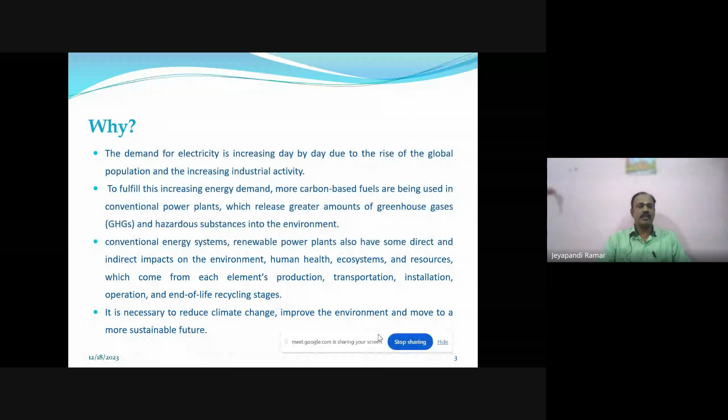What's the importance of green energy? It provides real benefits for the environment, since the power comes from natural resources such as sunlight, wind, and water, creating energy with a zero carbon footprint, which is a great stride toward a more environmentally friendly future. If we can use it to meet our power, industrial, and transportation needs, we will be able to greatly reduce our impact on the environment.

Green energy is generated from renewable sources rather than limited sources such as fossil fuels. Consumers, businesses, and governments worldwide are shifting away from fossil fuel energy toward green energy to lessen the impact of climate change and pollution. It is one of the most important forms of energy.

The key sources of green energy are mainly four: solar energy, wind energy, hydropower energy, and geothermal energy. These are the main sources for the world's life in terms of energy.

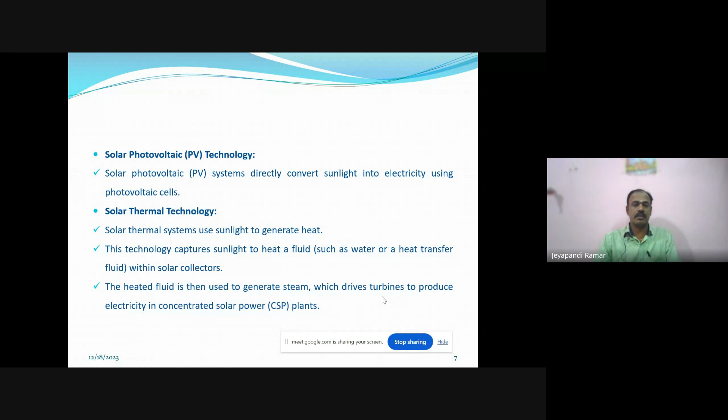As far as solar energy conversion goes, how does a solar panel work? The solar panel consists of multiple solar cells arranged in a grid form, and when sunlight hits the solar cells, it excites the electrons in the semiconductor material, creating an electric current.

This direct current is called DC. The DC is converted into alternating current, AC, using inverters to power homes, businesses, or to be fed into the grid.

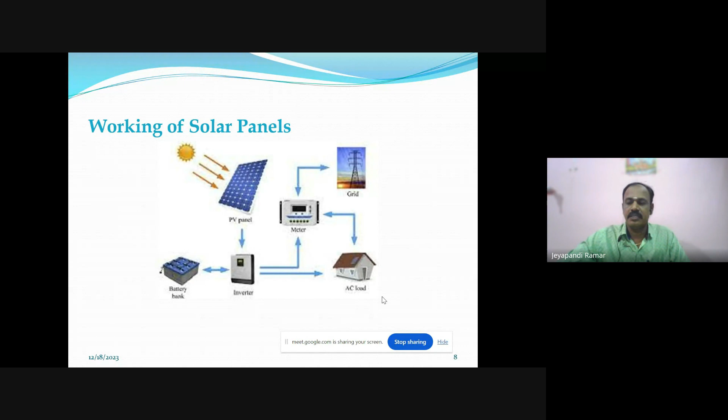The main solar system is used in our homes, restaurants, and workplaces. Applications of solar energy include residential use, powering homes through rooftop solar panels to reduce electricity bills, commercial use providing energy for businesses, offices, and industries, and utility-scale use for generating large-scale electricity through solar farms to supply our communities. Solar is our main energy source from the sunlight.

What are the benefits of solar energy? Solar energy is a clean and renewable resource, producing no greenhouse gas emissions or air pollutants during electricity generation. It contributes to reducing carbon footprint and mitigating climate change. The continued advancement and adoption of solar technology contributes significantly to a cleaner and more sustainable energy future.

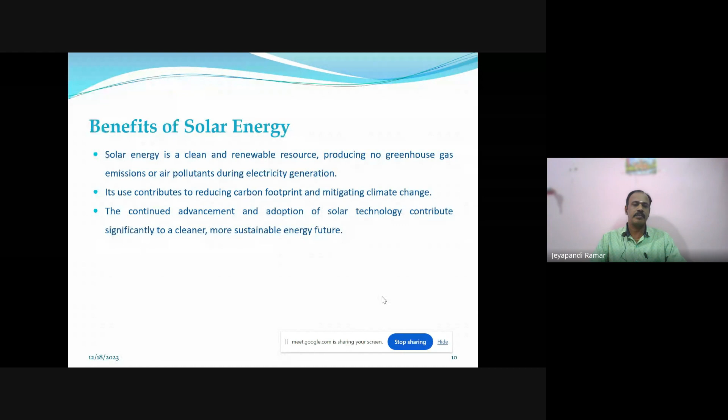This is the main energy of the future. Case studies of solar energy include the Kamuthi Solar Power Project in Tamil Nadu, India. Located in Tamil Nadu, it is one of the largest solar power plants in the world, with a total capacity of around 648 megawatts. It covers a vast area with solar panels and contributes significantly to India's renewable energy goals.

Another case is the Pavagada Solar Park in Karnataka, one of the largest solar parks in India, with a total capacity of 2000 megawatts. The park aims to harness solar energy to meet the state's power requirements.

Next is the Rewa Ultra Mega Solar Park in Madhya Pradesh, developed through a joint initiative of the Solar Energy Corporation of India, SECI, which is a main source for renewable energy in the solar system.

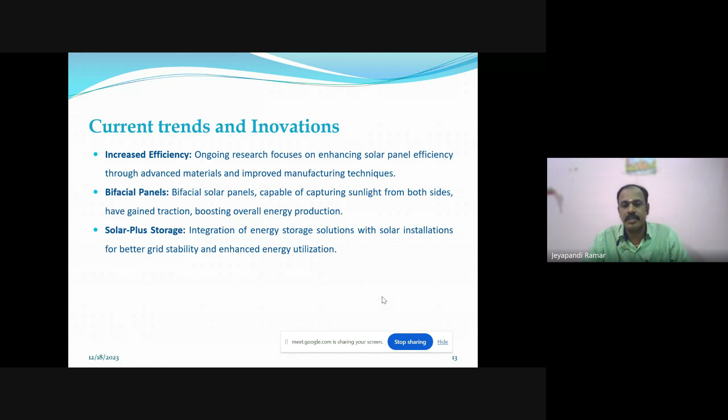Solar plus storage involves the integration of energy storage solutions with solar installations for better grid stability and enhanced energy utilization. As for future prospects, the first is perovskite solar cells.

It's for advancements in perovskite-based solar cells, offering potential cost reductions and higher efficiency compared to traditional silicon-based photovoltaic cells. There is also research into tandem solar cells, combining multiple materials to capture a broader spectrum of sunlight and improving overall efficiency.

Yes, this is mainly solar power energy. The Tamil Nadu government is introducing solar power for agriculture purposes, where solar electricity is converted for agricultural use.

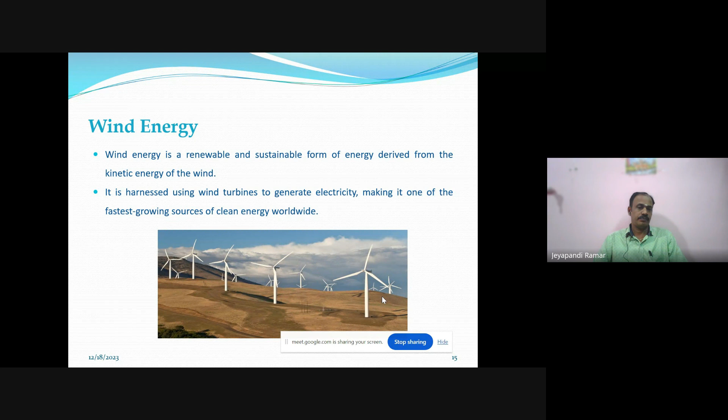Okay, so wind energy is a renewable and sustainable form of energy derived from the kinetic energy of the wind. In Tamil Nadu's Kanyakumari and Tirunelveli districts, wind energy production is increasing. It is harnessed using wind turbines to generate electricity, making it one of the fastest growing sources of clean energy worldwide.

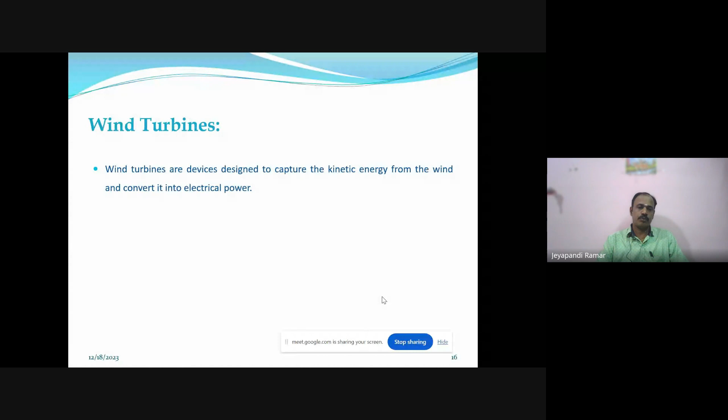And what are turbines? They are devices designed to capture kinetic energy from the wind and convert it into electrical power, capturing the wind in different phases. How do wind turbines work?

When the wind blows, it causes the turbine blades to rotate. This rotational motion drives the rotor, which is connected to a generator, producing electricity as it spins.

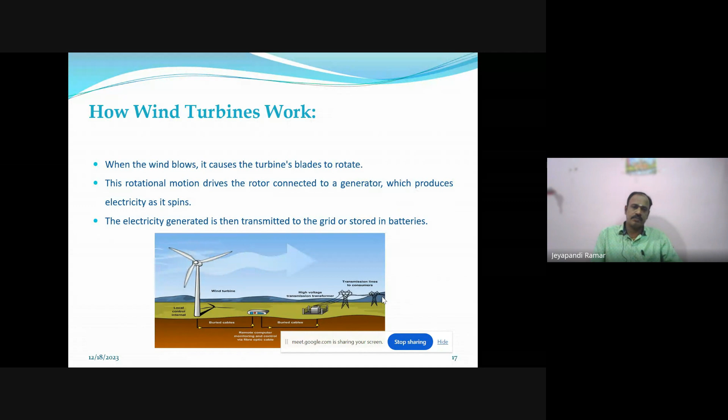So more energy comes from wind energy in those areas. In terms of environmental benefits, wind energy is considered environmentally friendly, producing no greenhouse gas emissions or air pollutants during electricity generation. It helps reduce reliance on fossil fuels, mitigating climate change and improving air quality.

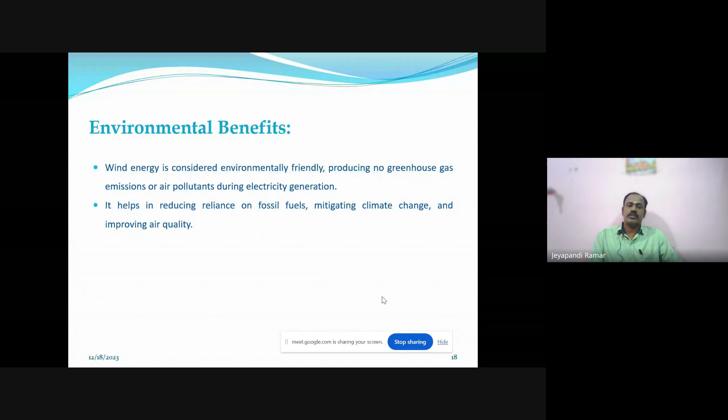As for challenges, there is intermittency—wind energy availability fluctuates based on wind speed and weather conditions, leading to intermittency in power generation, affected by environmental or climate change.

Another challenge is land use and visual impact. Large-scale wind farms may require substantial land area and can sometimes face opposition due to visual and environmental concerns. These are the main challenges for wind energy.

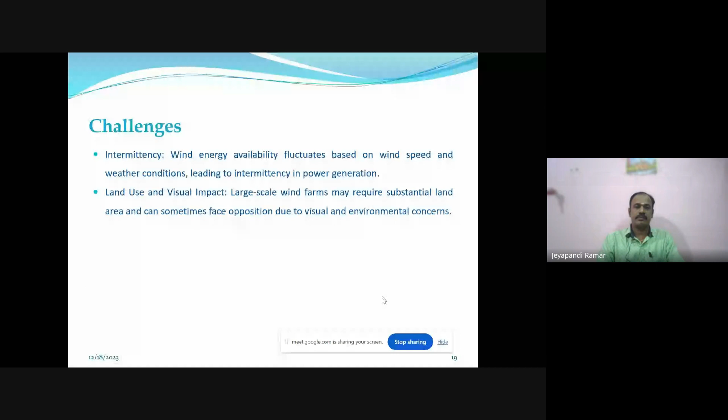Case studies of wind energy include major wind farms. One notable project is the Jaisalmer Wind Park in Rajasthan, one of the largest operational wind farms in India.

Regarding Tamil Nadu's wind power capacity, as mentioned, Kanyakumari and Tirunelveli districts are the main sources. It has several wind farms, including the Muppandal wind farm, which has a substantial number of wind turbines and contributes significantly to the state's renewable energy goals.

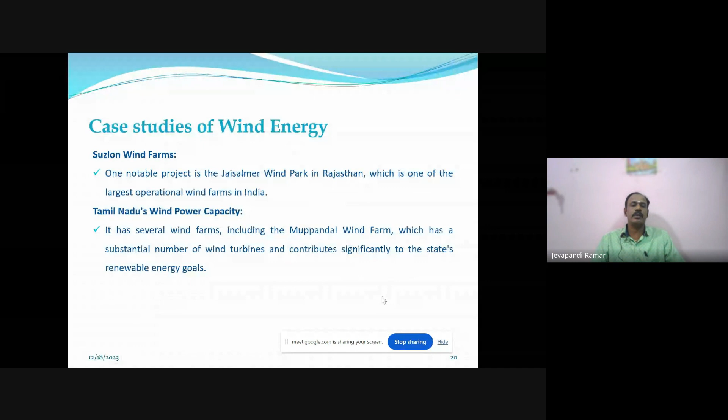Gujarat's wind projects leverage the region's favorable wind conditions to generate clean electricity. Gujarat is another Indian state significant for its wind power capacity, among others.

Next is Coimbatore's wind turbine cluster—the city hosts numerous wind turbine component manufacturers, contributing to India's indigenous manufacturing capabilities in the wind energy sector. India's wind energy sector has witnessed substantial growth and innovation, contributing significantly to the country's renewable energy goals.

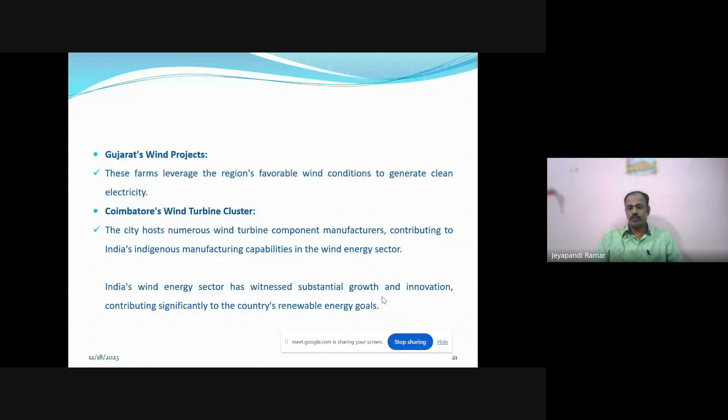As for future prospects, there is expansion of floating offshore wind farms in deeper waters, leveraging stronger and more consistent winds for increased energy generation. This includes advanced wind turbine designs and the development of larger, more efficient turbines with smart technologies to maximize energy capture and reduce operational costs. These future perspectives are very important for developing wind energy sources.

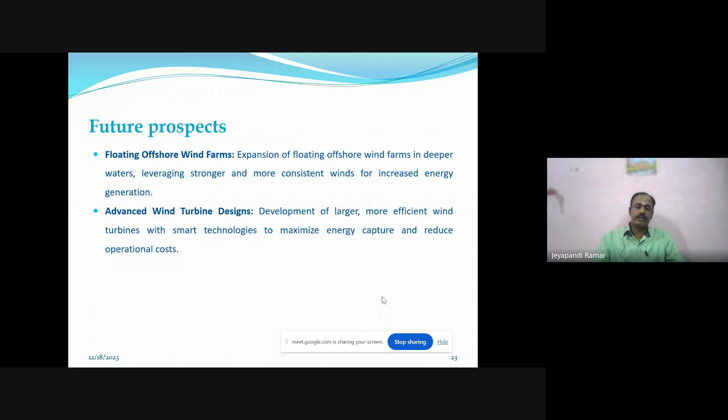And third one is hydropower. Is that mainly for hydroelectric power generation? It's mainly for dams.

It's a renewable energy source that harnesses the energy of flowing or falling water to generate electricity. It is one of the oldest and most widely used renewable energy technologies. As far as the hydropower system, the water flows with fast movement and collects electrons from the water to generate energy for electricity consumption.

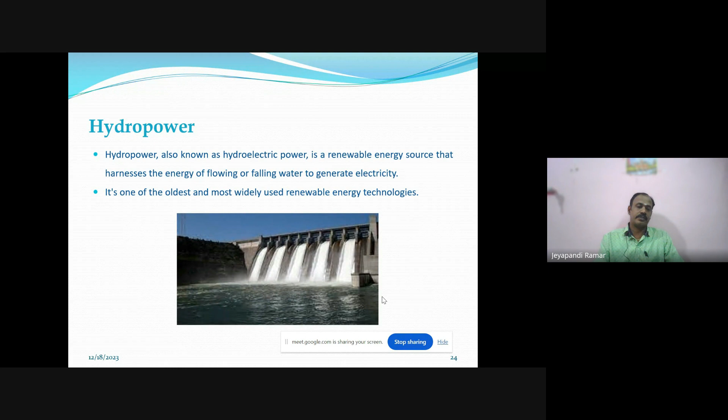How does hydropower work? You can view these dams. You can visit Tamil Nadu people, go to the Vaigai dams, and see how electricity is prepared from these dams.

The hydropower utilizes the kinetic energy of moving water to produce electricity. It involves converting the potential energy of water stored in dams, or kinetic energy of flowing rivers or waterfalls, into electric power.

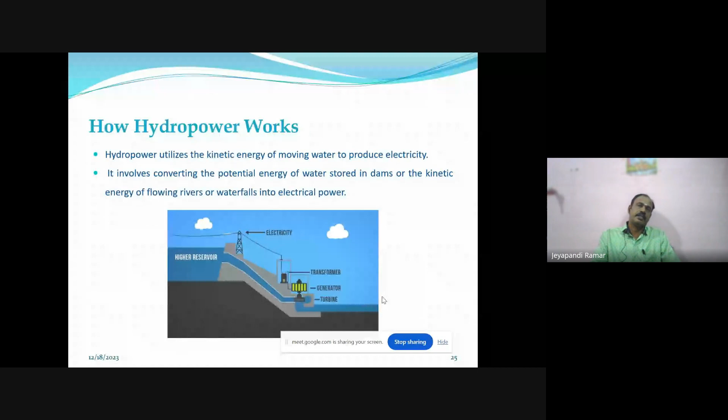Some main rivers or hill stations use the force of water for the same methodology. The components of hydropower are the dam or diversion structure. First, the water is collected or diverted from the river to create a reservoir or channels. During the rainy season, much more water is collected in the dams to save water for other times.

What about the turbines and generators? The water from the reservoir is released through the turbines, which are connected to the generators. The force of the flowing water turns the turbines, generating electricity. This is mainly for electricity formation.

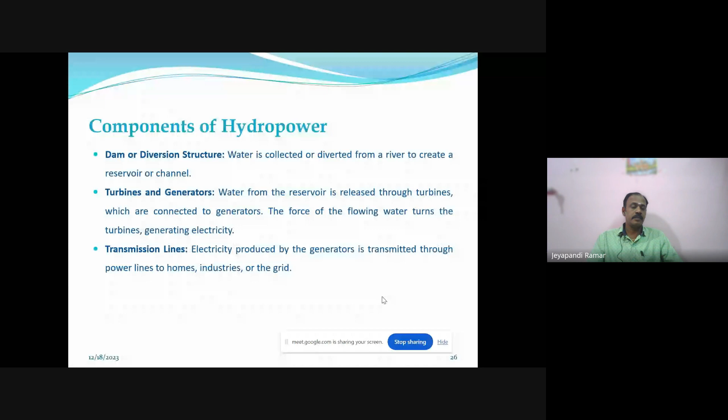For transmission lines, as seen in the image, electricity produced by the generators is transmitted through the power lines to homes, industries, or the grid for consumer use. So this is the main energy consumption process.

What are the types of hydropower? There are mainly three types. The first one is conventional hydropower, which mainly utilizes dams or reservoirs to store water and control its flow through the turbines.

The second one is run-of-river hydropower. It generates electricity without significant water storage, using the natural flow of rivers or streams to power turbines. So with run-of-river, you get electricity directly from the river.

The third type is pumped storage hydropower. This stores and generates electricity by pumping water from the lower reservoir to the higher one during off-peak times, and releasing it to generate power during high demand periods.

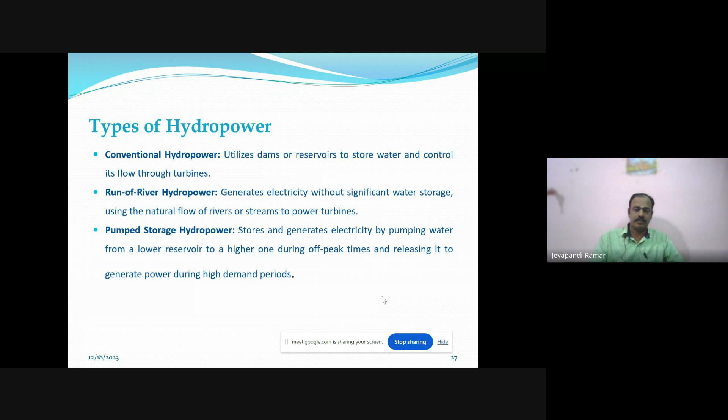Environmental considerations: while hydropower is a renewable source of energy, large dams can have environmental impacts, including changes to ecosystems, displacement of communities, and alteration of river flow patterns. That's the main environmental consideration.

There are smaller scale run-of-river projects that make for fewer environmental impacts, which is a main consideration.

The advantages of hydropower: it is renewable and clean, relying on the water cycle and producing minimal greenhouse gas emissions or air pollutants.

It's reliable and flexible, providing consistent and predictable power output. Some systems can quickly respond to changes in demand, providing flexibility and predictable power output.

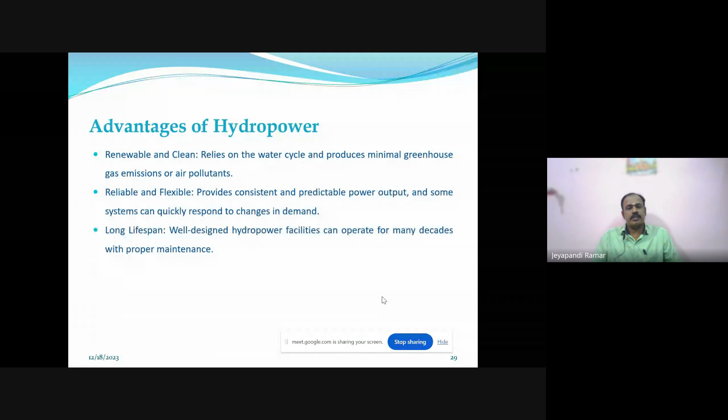Flexibility is an advantage of hydropower systems, along with long lifespan. Well-designed hydropower facilities can operate for many decades with proper maintenance. That's the main long lifespan benefit of hydropower.

Case studies of hydropower systems: the Tehri Dam and hydropower complex in Uttarakhand. The dam is on the Bhagirathi river in Uttarakhand and is one of the highest dams in India. It has a total capacity of 1000 megawatts, with a reservoir and hydropower complex housing several generating units.

And the Sardar Sarovar Dam in Gujarat is located on the Narmada River. It is one of the largest multi-purpose dams in India.

This has a total capacity of over 1000 megawatts, with a hydropower plant of installed capacity over 1000 megawatts, contributing to the state's electricity generation and irrigation needs.

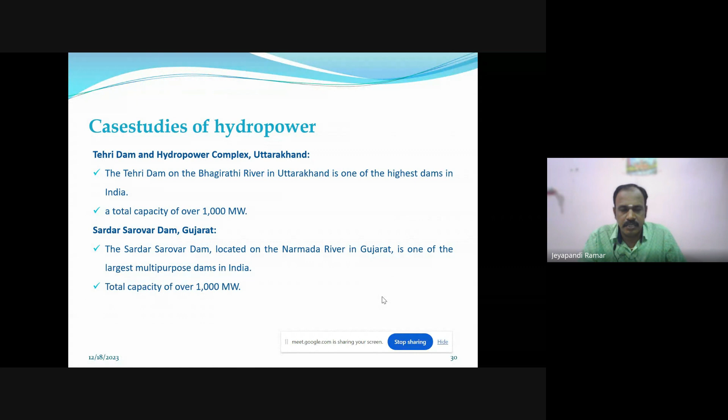Next is the Bhakra Nangal Dam, located in Himachal Pradesh and Punjab on the Sutlej River, among the largest multipurpose dams in India. Its total capacity is 1300 megawatts. It supplies water for irrigation, helps control floods, and has several hydropower stations with combined capacity of more than 1000 megawatts, supporting both Punjab and Himachal Pradesh.

Next is the Nathpa Jhakri Dam in Himachal Pradesh, also on the Sutlej River. It is one of India's largest hydropower projects, with a total capacity of 1,500 megawatts.

Next is the Koyna hydroelectric project in Maharashtra, on the Koyna River. Its total capacity is 1,900 megawatts, supplying water for the state.

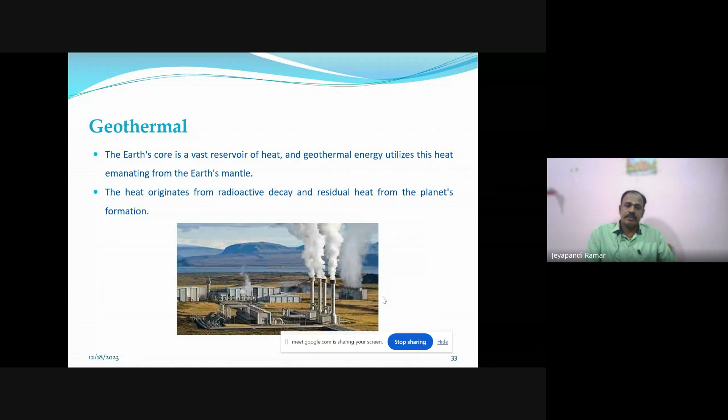Next is the fourth source: geothermal energy. The Earth's core is a vast reservoir of heat, and geothermal energy relies on this heat emanating from the Earth's mantle. The heat originates from radioactive decay and residual heat from the planet's formation.

There are two main types of geothermal energy. The first is electricity generation, where power plants utilize steam or hot water from underground reservoirs to drive turbines connected to generators, producing electricity. The second type is direct use for heating and cooling, which utilizes geothermal heat pumps to transfer heat from the ground for heating buildings in winter and extract heat from buildings for cooling in summer.

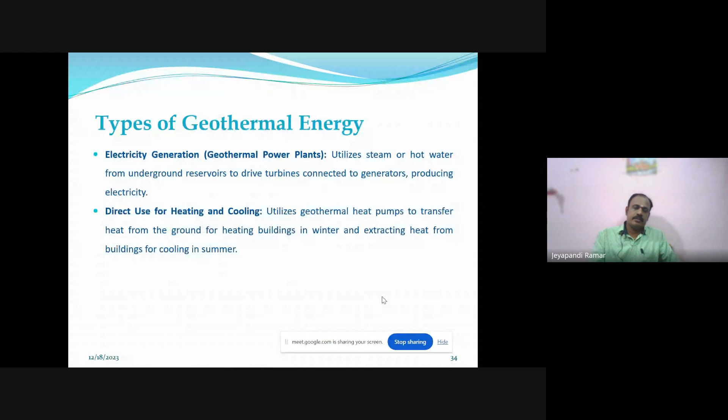So there are two main types of geothermal energy, and for power plants there are also types: dry steam power plants, which use high pressure steam directly from underground reservoirs to drive turbines and generate electricity, and flash steam power plants, which use high pressure hot water from underground reservoirs that flashes to steam as it rises to the surface to drive the turbines.

Then there are binary cycle power plants, which use a moderate temperature geothermal resource by transferring heat to a working fluid with a lower boiling point, which vaporizes and drives turbines. This is used in areas with moderate temperature geothermal resources.

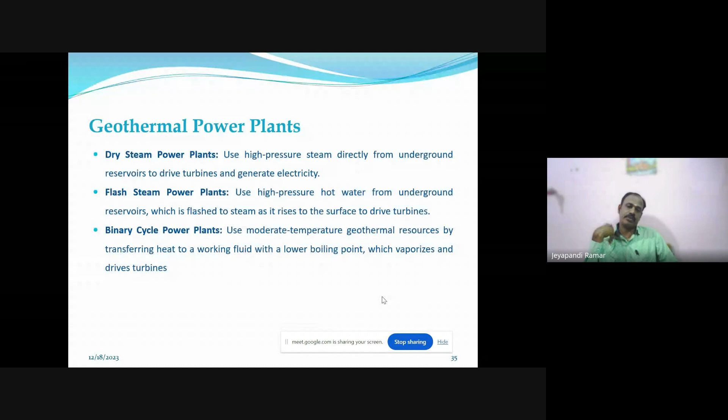There are also environmental benefits. Geothermal energy is a clean and renewable energy source that produces minimal greenhouse gas emissions and air pollutants during electricity generation or direct use applications.

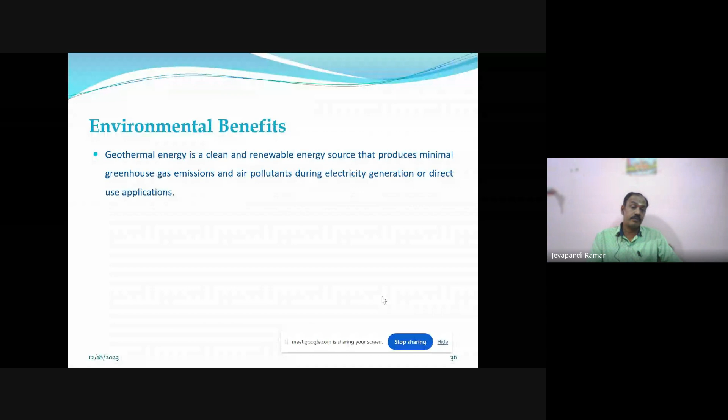As for applications: first, electricity generation, where geothermal power plants provide electricity for homes, industry, and grid supply in regions with significant geothermal resources. Second, heating and cooling systems, where geothermal heat pumps use the Earth's stable temperatures to provide efficient heating and cooling for buildings, reducing energy consumption.

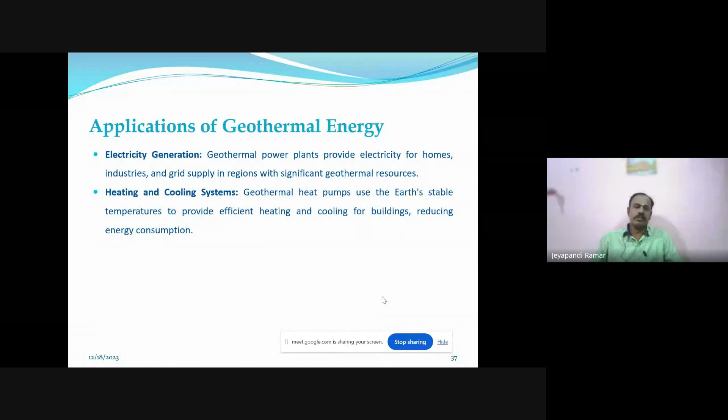The Puga geothermal field is located in Ladakh, Jammu and Kashmir. This field in Ladakh already has some ongoing projects, and it's one of the most well-known geothermal sites in India. However, as of now, no large-scale geothermal power plants are operational in these regions.

It's known for its hot springs and geothermal activity, and various studies have been conducted on the potential of this area for geothermal power generation. Another location is the natural hot springs in Himachal Pradesh. These springs possess geothermal characteristics, and there have been discussions and studies exploring the possibility of utilizing this source for geothermal energy production.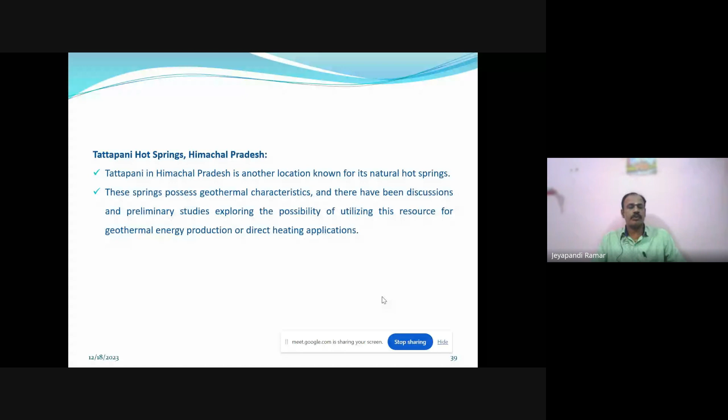So as far as battery technology is concerned, and the grid scale storage, the deployment of grid scale energy storage systems such as pumped hydro and batteries based storage helps manage frequency and enhance stability.

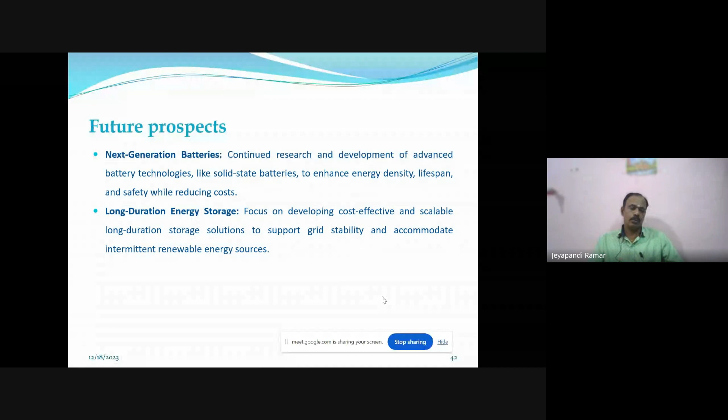So our conclusion is that by adopting a variety of green energy solutions, we can create a totally sustainable energy position without damaging the world we all live on.

Green energy looks central for the future of the world. This is the future - based on green energy, not petrol, not fuels, only green energy. These renewable energy sources are not just good for the environment, but are also a leading edge.